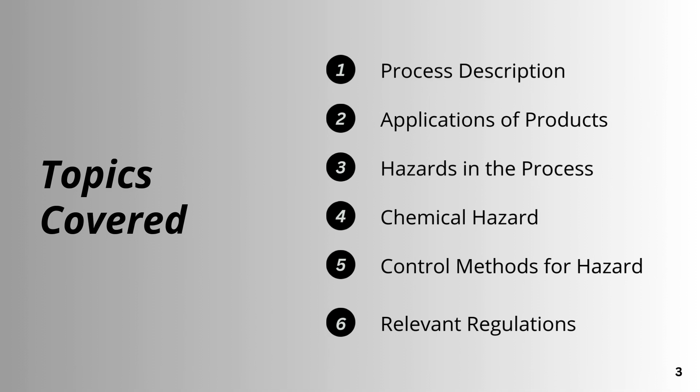The metal foundry process involves multiple stages. First stage, you'll have the charge preparation and melting. So scrap metal and ingots are melted with flux to form alloys. You'll have sand and core preparation, in which sand molds and chemical binders are prepared for shaping.

You have molding and pouring. Molten metal is poured into molds and cooled to form solid castings. You have shakeout and cleaning, where castings are removed from molds, cleaned, and finished. And then you have sand reuse, where sand is processed and recycled for future molds. Each step is interconnected, minimizing waste while ensuring precise manufacturing.

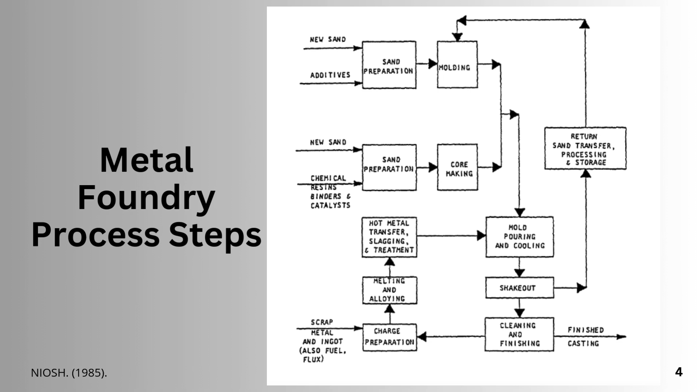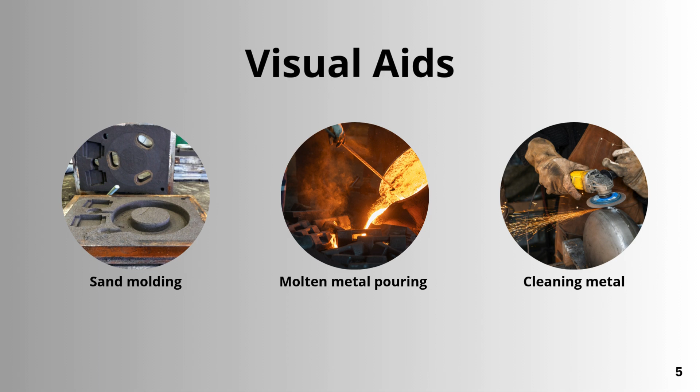Here are photos illustrating foundry operations, such as sand molding, molten metal pouring, and cleaning metal.

Foundries produce cast metal components used in automotive parts, such as engine blocks and brake discs, industrial equipment, such as pumps and valves, and construction materials, like structural components and pipes. These products are integral to industries worldwide, highlighting the importance of safe and efficient operations in foundries.

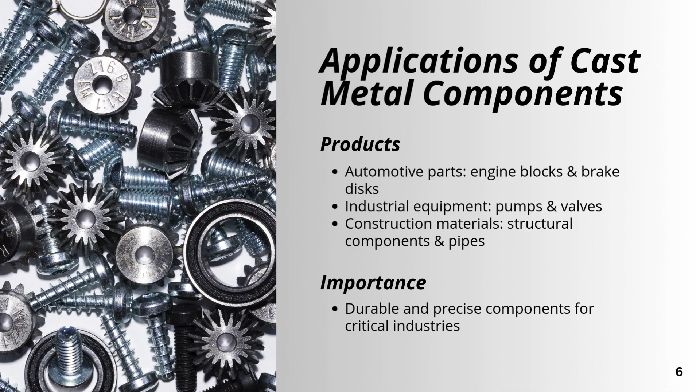Workers in foundries face several hazards, such as chemical hazards, where they can be exposed to heavy metals like lead and cadmium. They can be exposed to fumes from molten metal, and they can have exposure to silica dust from sand. While biological hazards may be rare, they can include mold contamination.

In physical hazards, you can have heat stress from molten metals, a risk of burns and fires, and then noise. In ergonomic risks, you can have heavy lifting and repetitive tasks that can lead to injuries. Understanding these hazards is critical to implementing effective safety measures.

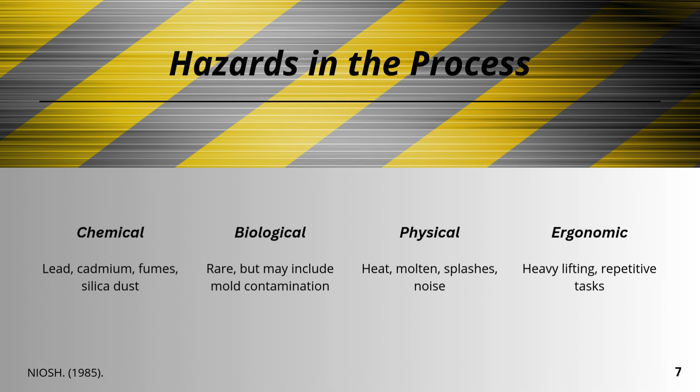The hazard that I'm going to focus on today is silica dust. Silica dust is created during sand preparation and shakeout. OSHA limits exposure to 50 micrograms per cubic meter over an 8-hour workday.

To protect workers, the following controls should be implemented. With engineering controls, you can use water to suppress dust generation at the source during operations such as cutting, drilling, or grinding. You can use general ventilation systems to dilute and remove airborne dust.

You can enclose high dust generating processes to keep silica dust contained and prevent it from spreading to other areas. And you can replace silica containing materials with less hazardous materials where it is feasible.

With administrative controls, you can educate workers on the hazards of silica dust, proper usage of controls, and the importance of safety protocols. You can rotate workers to limit the amount of time each individual spends in areas with high levels of silica dust. And you can conduct regular air monitoring to measure silica dust levels to ensure they are below permissible exposure limits.

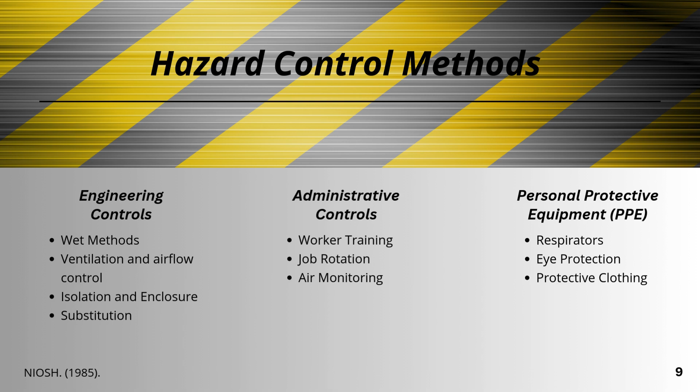Issues with controls could be the cost, the maintenance of the ventilation systems, and worker compliance with PPE use.

Metal foundries are regulated by state and federal standards. So while silica doesn't have a specific regulation in the state of Montana, they do have the mining license tax, which applies to metal processors. And then Montana's DEQ enforces air quality and hazardous waste rules.

Then you have OSHA standards, one for silica, which limits exposure to silica dust. You have hazard communication, which ensures worker awareness of hazards like silica, lead, and cadmium. You'll see the hazard pictogram to the right as a health hazard pictogram, which is applicable to silica.

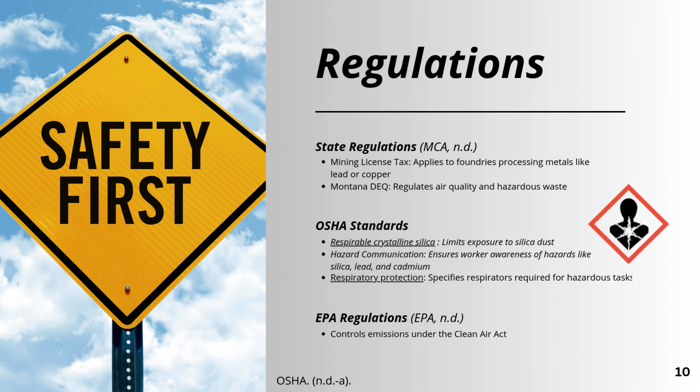Then you have a respiratory protection standard, which specifies respirators required for hazardous tasks. I've linked both of the OSHA standards for silica and respiratory protection. EPA regulations help control emissions under the Clean Air Act. Compliance ensures safety for workers and the environment.

Let's recap what I've covered today. Metal foundries involve complex processes that are critical for manufacturing but can pose significant hazards. Silica dust is a chemical hazard that can have health risks if not controlled. Effective controls, including ventilation and PPE, are essential for worker safety, and compliance with OSHA and other regulations ensures safety and legality.